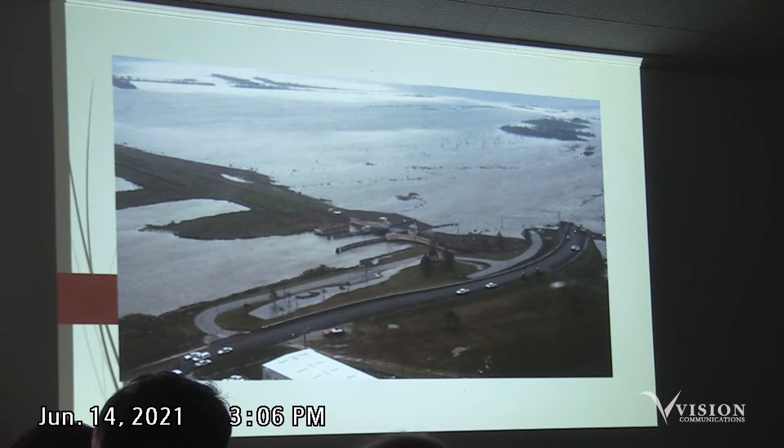And again, down at the Ontario floodgate, you see water going onto LA1, going under water. Whether it's a tropical storm or a hurricane, we have LA1 continue to go under. And again, the elevated highway: I talked to Marie today, and pretty soon they'll be getting some contracts written up to get the beginning of the elevated highway going.

And the other thing is, look, we have not flooded since Hurricane Juan. We've had storms get closer, as we just saw with Rita. But again, warn people: we know the hurricane levee is good, we know that we're getting better, getting the levee higher. But when you look at Katrina, where they show the storm, it's heading right for the levee. If it had stayed on that route, just to give you an example, the worst of it hit Waveland, Mississippi. Waveland is about 20 feet above sea level where the railroad tracks are. That storm was 28 feet, and water went all the way to the embankment of I-10. So if that storm had gone through, there's no doubt we would have been totally destroyed.

And just so everybody understands, anybody from Brownsville, Texas, throughout the Gulf Coast, throughout the East Coast, all the way up to Maine, anybody that gets a 28-foot storm surge gets destroyed. Every coastal city. We talk about Superstorm Sandy. It pushed an 8-foot storm surge in New York, and you saw what kind of damage it did. When you think about 28 feet.

So, just so we remind everybody that if there's a powerful storm, hopefully you move out, let the system protect your property, get to naturally high ground. And that's going to be the parish to give those recommendations. But we just want to warn people that we can't guarantee that if the water's high in the levee, you're not going to flood. Okay, that's one thing we know.

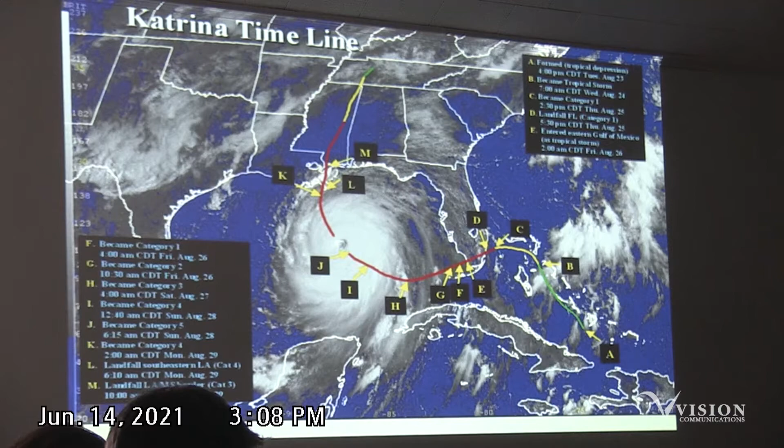Now, the highest water we've ever gotten is 8 feet. But it just takes one storm, we just need to be aware of it and pay close attention. And there's the work that's going on. This is some work that we're doing. We're raising the levee all the way to the farm that ConocoPhillips Apache has. That's where Paul has the farm.

And we've got an 18-foot elevation, then it ties to a 13-foot levee. What we want to do is bring that levee closer to 16 feet. So to get things started, I call it going when we have the ability to expend some money. And so we got them started early, but we want to try to bring that 14 to 16 feet.

Now, what I'd like, and later when we go to the regular meeting, we can spend up to $250,000 without having to advertise, and we can leave these people working on that until we get to that level. So we have two small companies that are doing the work for us, and we'd like for the board to approve what we've already done and then to limit those contractors in that project at $250,000 in our attempt to get it to 16. But if we get to 14 with that money, we get to 14.

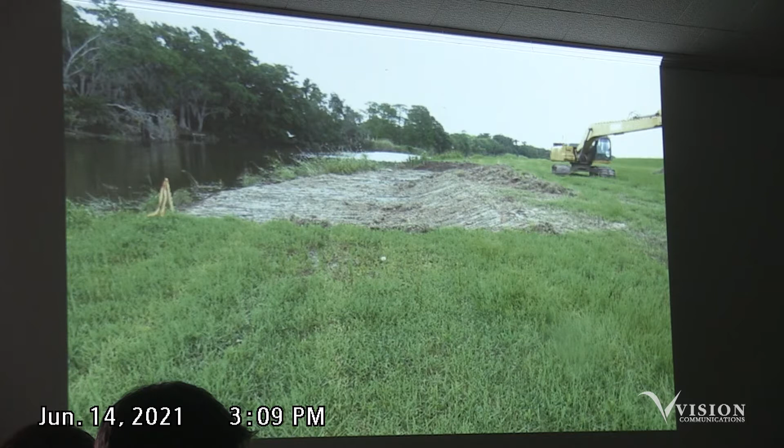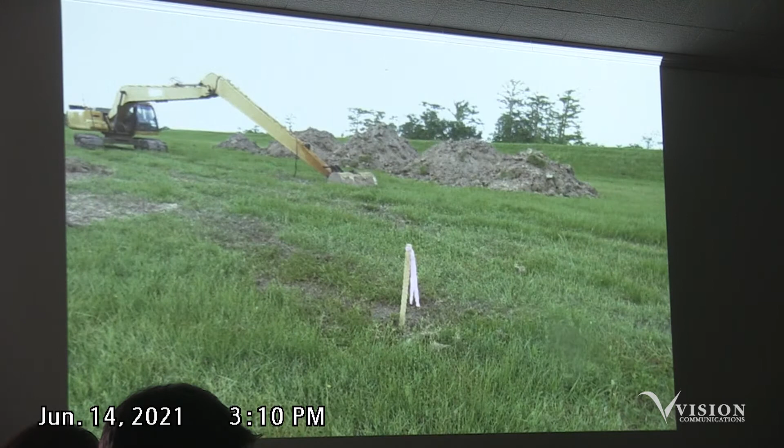But improve that system, and that's going to bring us to where the bridge connects to that farm. Now, after that point, it's going to take it down to 13, because we don't expect that water to go over the two levees and still stay up at that 16-foot elevation. And basically, we're digging out some dry dirt along the bank. Later, we'll go back and go in the water and then fill back in where we took the dry dirt out. Dry dirt's going to end up on top of the levee.

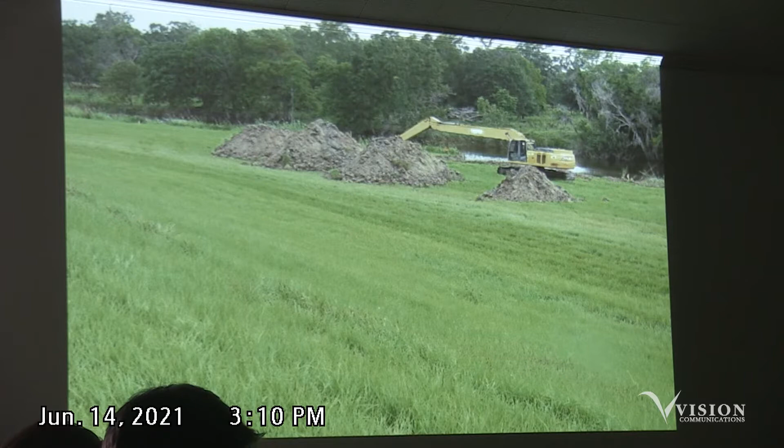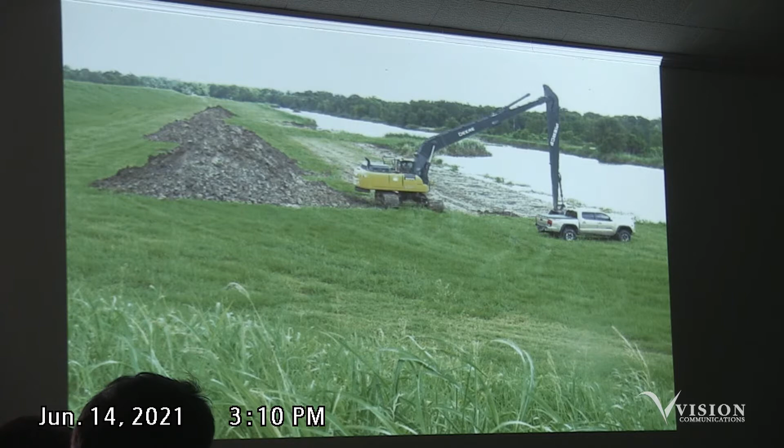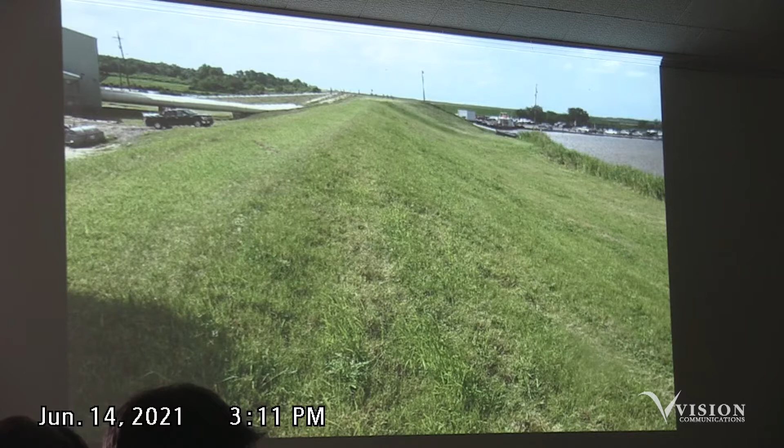We're not going to have it completed by this hurricane season, but it will be ready for next hurricane season. That's a section between pump station number 2 and 4, Apache 4. That's that same area, some of the different work. Over here, we're right around about 14-foot elevation right here. That's outside the system. Here we raised, this is about the ballpark of 16 in this area here. That's on the outside of the system.

And then this is where we did the marsh, this is the mitigation for the Morganza project. And it's finally starting to fill in real good. It's a little bit high, it's taking a little while to grow, but it means it's gonna last and not go under water a long time. So it's a little bit higher than what you need for marsh, but it'll slowly get there and get vegetated.

This is some of the other projects that, again, ConocoPhillips, Ducks Unlimited, the parish, CPRA, ConocoPhillips and Ducks Unlimited teaming up. They put and protected with marsh or terraces probably 10 miles of our levee, right on the outside to help protect it. So it's been a great partnership. It's good environmentally, and it's good that it's on the edge of the levee protecting the levee.

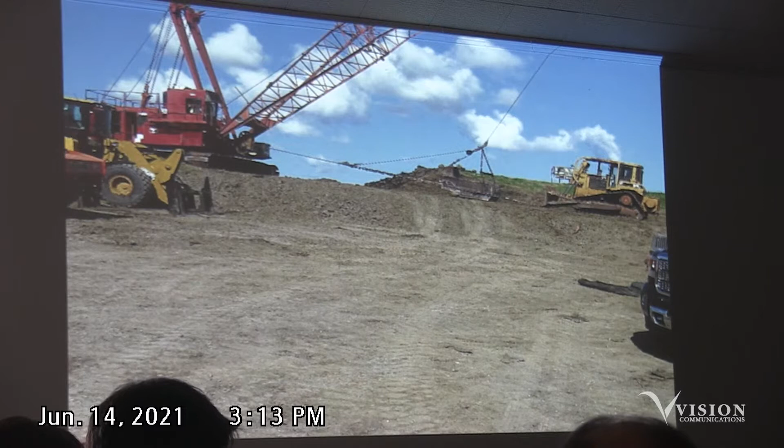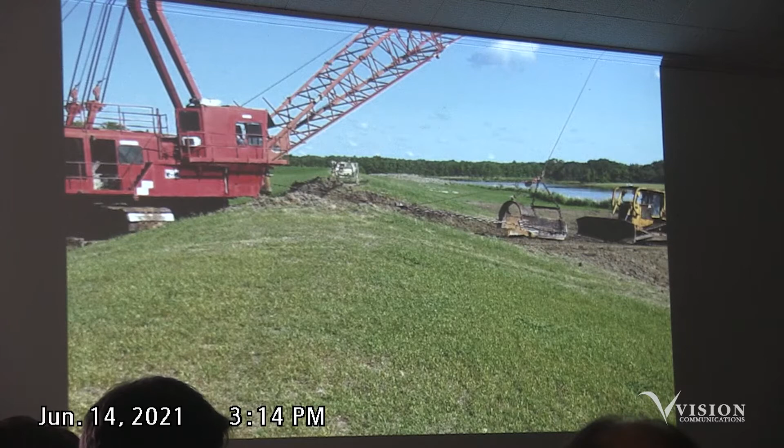If they would have gone early, we'd probably let them cut it deeper, but they cut it. Got their barges out, and the levee's been rebuilt and replaced and packed and compacted. So we're back to where we were before, which is a good situation. And again, this is what they cut down to. But it's in good shape now.

And this is one area that we had taken some dirt. We're gonna have to work out a system to be able to recoup the dirt that's right on the edge of this wet stuff. So we'll fill this in somehow and then be able to take that dirt in the future. Again, the projects on the side, this was some marsh that was made in 2010, and it's still looking great, and it's on the outside of the container. So some of the things are going good.

Here's the work behind Golden Meadow, at the Golden Meadow pump station. We had a 13-foot level of protection at that wall, and we had the levee up to 17. Now we got the wall up to 17. Here's where it used to be concrete. We've got that filled in all the way to the ramp that we have. It used to be to this level, and now we got all the way to 17. So this was the lowest spot we had on the southern part of the system. We're glad we've got it done.

The only reason we waited that long is we knew that even if it got overtopped, we weren't going to lose that wall. You had a splash pad, you had the A-frame supporting it, but water could have gotten in and caused some localized flooding. Now, not to say we won't get overtopped, but it's going to take a heck of a lot more water to get over the top of this wall that's been raised to 17 feet.

This is the levee at D South. This is near the Yankee Canal area, Schwartz's farm right now. The contract, we hadn't finished, but we've got this up. It's close to 16. We're trying to get it at the 17, 18. But we've improved the levee at this spot. And Brasco is working that same area.

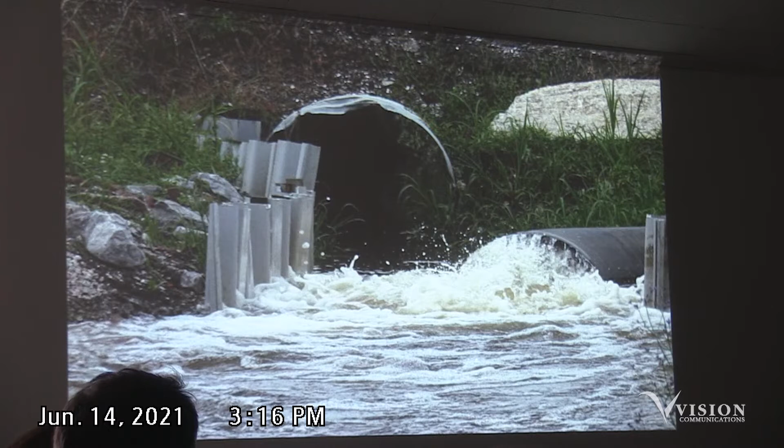We had some problems. We have a culvert that goes through. When the water finally drops, we open this culvert to drain that water, because there are some cattle, and then of course you got the Delta Farms Road that goes underwater. We had this pipe fabricated to efficiently get the water out, so that's it coming from outside. And this is just to show you that we have the drainage for the front people. Their pipe can easily get its water in there also without causing any backup. And we can do both of them where both groups can do well.

The Congress is looking at reauthorizing the flood insurance program. They're talking about this Risk Rating 2.0, and it doesn't look good, okay? We've got some real concerns, because now they're saying that they're just gonna deal with the information that they have, the computer models that they have. And we were working with this SWAT project where everything we push is that they go down, talk to the engineers, go see the projects on the ground, and give them credit. If they're there and they do their work, give them credit.

Well, the LAMP process, now the feds do have this. And what it's showing is that our levee system is keeping out the highest water that's on the outside. And so they're showing some building elevations. Right now you gotta build to 2.5, 3, and 3.5, okay? They're showing some places in here at a -3, and that's because of rainfall. The land, like say inside the globe, is at a -9, and you can build at a -4 in there. So you still got a lot of space between the ground and where you would build at.

Now that they have this, we think we can force them to say, look, you provided this information, use it. Maybe we'll do okay, but we're just not sure what direction they go with it. But this is good news for us. It gives us a chance to keep the preferred risk that a lot of our people have.

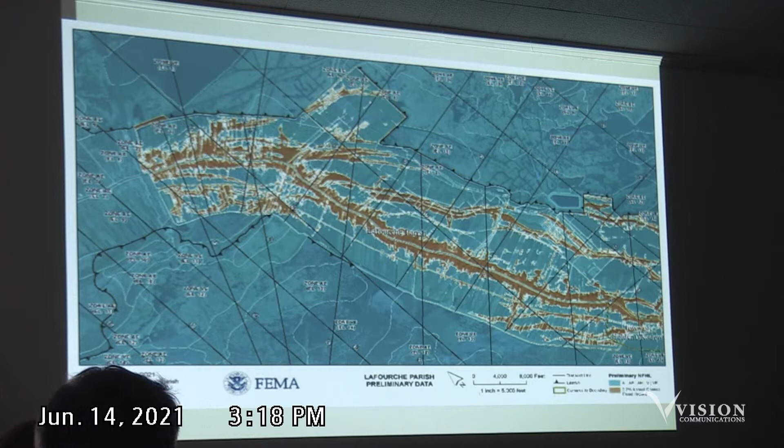Don't turn it on yet, wait on the button. Oh, okay. Thank you very much.

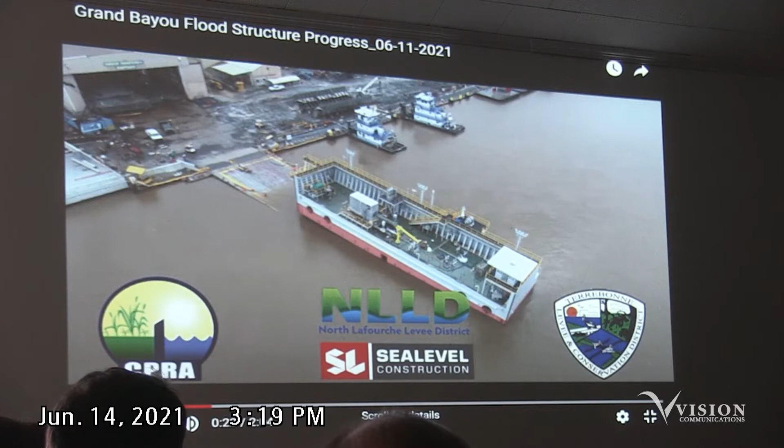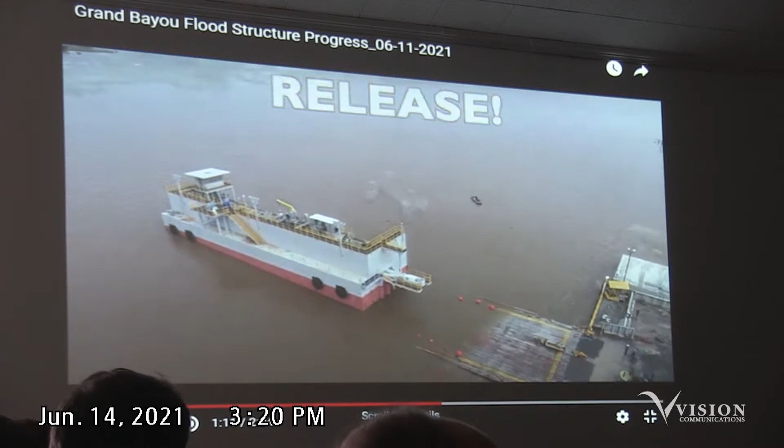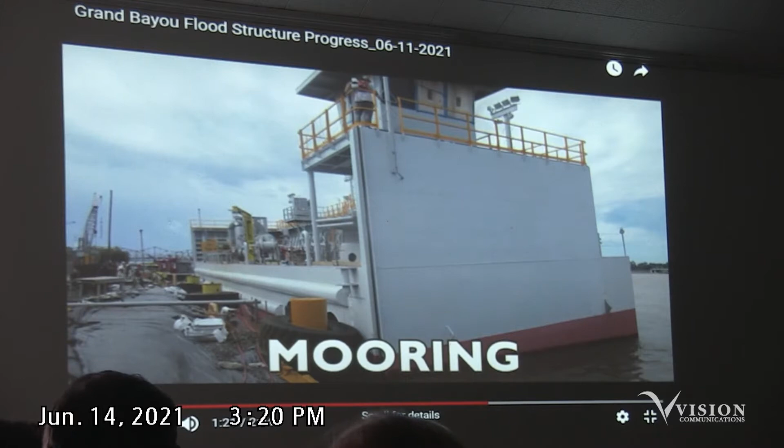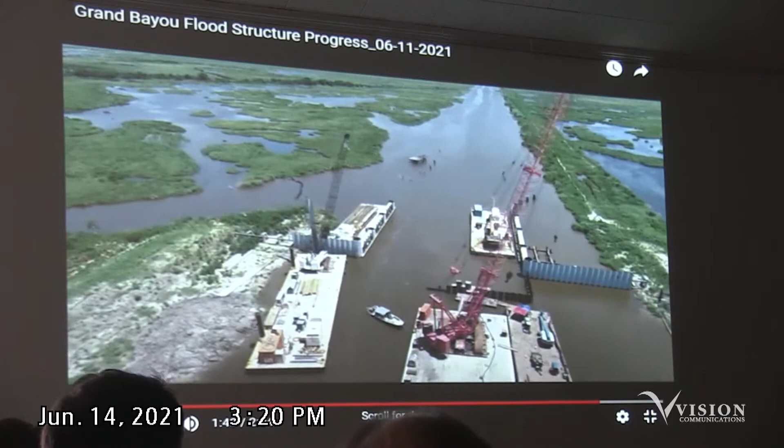Mitch called and said if necessary they can get underway Wednesday and have it in place on an emergency basis if we have a storm. Yeah, Laura's been telling us that once we get it over there, whether it's fully connected or not, they're taking precautions and are prepared to actually install it right when it gets there. Laura can report that. It's all good news, by the way. All good stuff.

It's on its way. No, they're supposed to be on the way next week, but I think if this storm does develop and they need it, they can get it on the way by Wednesday and installed. And we'll talk about it some more. Laura's got all this. Almost looks like she works there. Wasn't more money, that's why.

Yeah. But the CDR levee, who's the contractor? We talked about the work that's being done. I'd like to have a vote allowing us to go up to $250,000 to raise the levee on CDR. You heard the recommendation by the town manager to appropriate up to $250,000 to raise the section of the levee from the basal pump station north.

No, this is the section to the farm, actually inside the bridge, actually inside the other levee. So, I need a motion and second, moved by Monty, second by Mac. Any discussion? All in favor, signify by saying aye. Aye. Opposed, no.